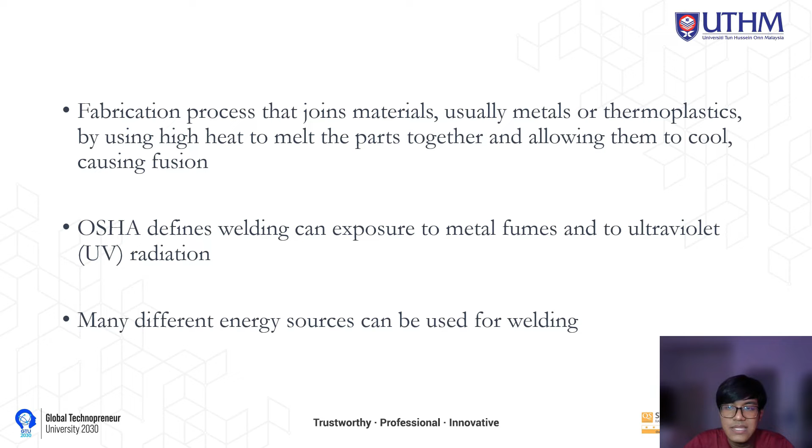Welding work is the fabrication process that joins materials, usually metal or thermoplastic, using high heat to melt the parts together and allowing them to cool, causing fusion. Welding can also expose workers to metal fume and ultraviolet radiation (UV). Safety hazards from this operation include burns, eye damage, electric shock, and crushed toes and fingers. Many different energy sources can be used for welding, including gas flame, chemical, electric arc, electrical, laser, electron beam, friction, and ultrasound. Welding can take place in a variety of settings, including open air, underwater, and even space.

Assalamualaikum warahmatullahi wabarakatuh, my name is Muhammad Haris. So, next is the planning for hazard identification, risk assessment, and risk control.

HIRARC is the strategy for identifying variables that may affect workers and others, such as weighing risk of harm, planning, implementation, and monitoring of measures to control risk at all times. So when a hazard appears to constitute serious concern, HIRARC action must be planned and carried out.

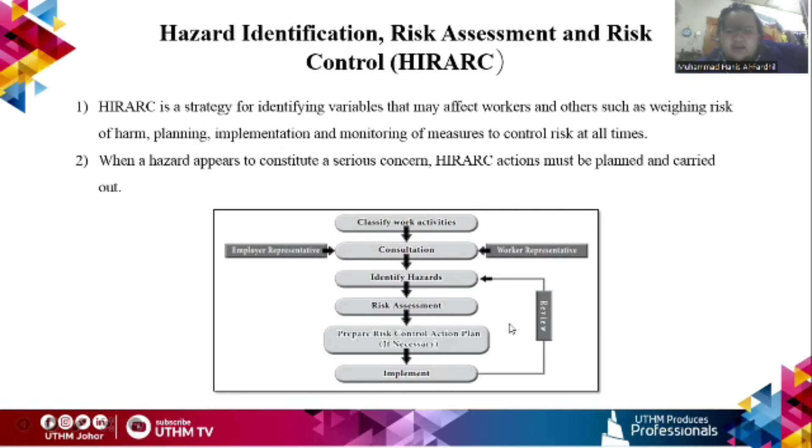This is the table of HIRARC from DOSH. It goes with classify work activities, consultation, which must have employer representative and worker representative, and then identification of hazard, risk assessment, prepare risk control action plan, and implement.

And then if review is needed, it will be done to identify other hazards. Next, we have hazard identification for welding work in construction. Hazard identification was used to determine actions that put employees' health and safety at risk. Health hazard, safety hazard, and environmental hazard are three sorts of dangers.

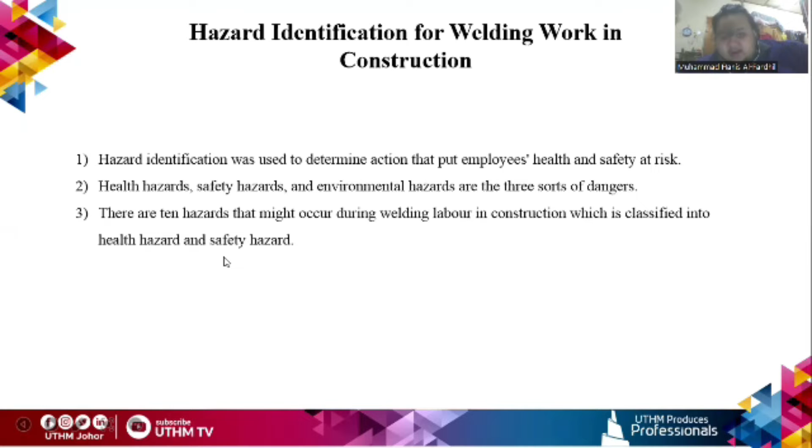In welding work in construction, we have health hazard and safety hazard. There are 10 hazards that might occur during welding work in construction, classified into health hazard and safety hazard. We have the example of health hazard. There are three health hazards that can be identified in welding work. Number one is exposure to fume and gas, which can cause serious issues such as respiratory infection, cancer, and speech and mobility impairment.

Next, we have noise, which can be extremely harmful to the ears, resulting in hearing loss. Noise-induced hearing loss can be caused by repeated or immediate exposure to loud noise. Lastly, we have exposure to UV and IR radiation.

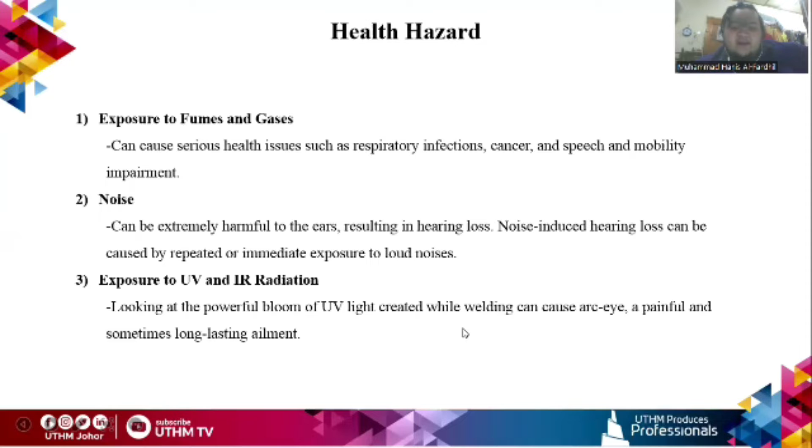Looking at the powerful bloom of UV light and light created while welding can cause arc eye, a painful and sometimes long-lasting ailment. Next, we have the safety hazard. The main hazard from safety hazard is physical. Physical dangers such as burns, eye injury, wounds, and crushed toes and fingers are always present in construction work.

Next, we have electric shock. Rapid electrical discharge in the human body can result in significant harm or even death. Then we have fire and explosion. The most common cause of fire is flammable objects near the working area in construction.

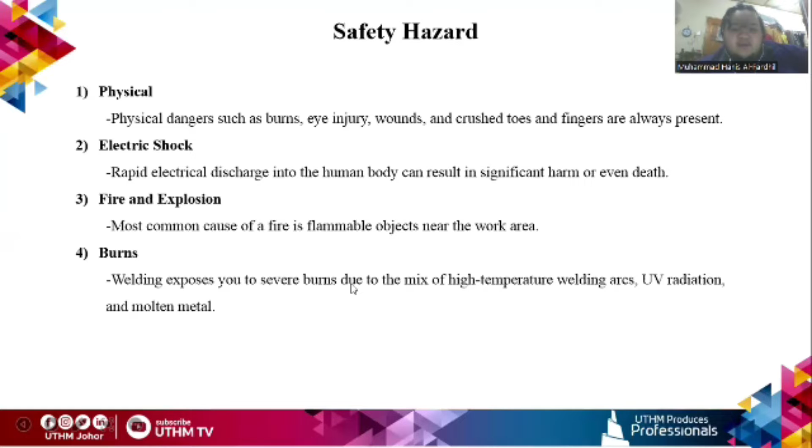Then we have burns. Welding process or work can expose people to severe burns due to a mix of high temperature welding arc, UV radiation, and molten metal. Continuing with the safety hazard, we have confined space.

Welding in tight places can result in lack of oxygen, fires, and inhalation of poisonous gases, such as argon and gasoline. Next, we have vibration.

Working with welding can also be linked to manual labor that utilizes vibrating power equipment. This vibrating power equipment can result in a variety of symptoms, such as hand arm vibration syndrome.

And lastly, we have trips or falls. Trips or falls can also happen in welding work. It is usually caused by hoses or other equipment lying on the ground as a consequence of ignorance or reluctance.

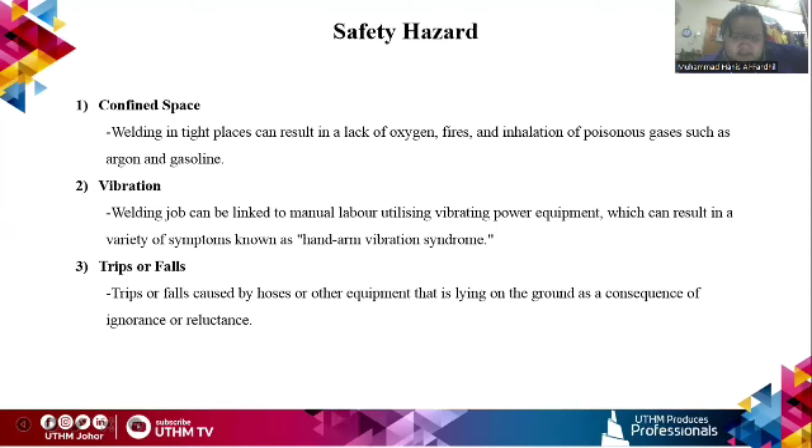Next, we have risk assessment. In risk analysis, a qualitative technique was used to convey the result, which is an analysis that employs likelihoods and severity. The risk analysis result will be presented in a risk matrix.

The risk may be evaluated by multiplying the likelihood and severity. This is the table of likelihood with the rating from highest to lowest, and it will be multiplied with the severity table, also from highest severity to lowest severity.

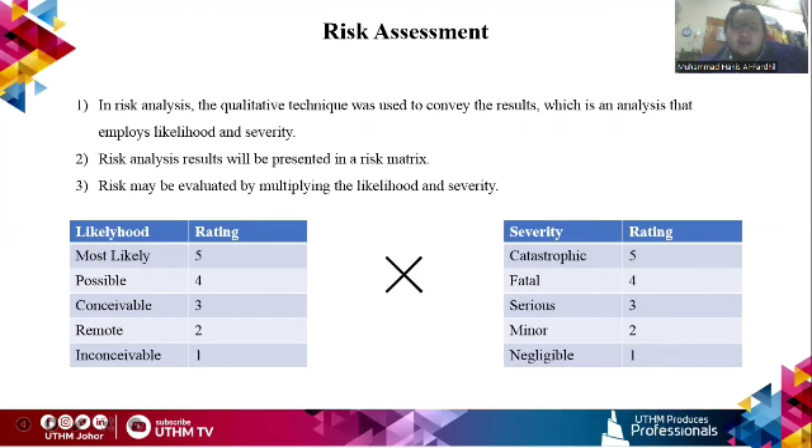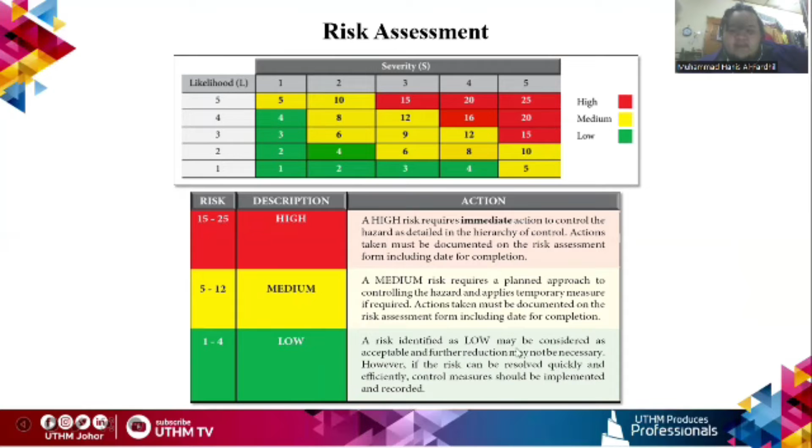And lastly, we have risk control. Eradication or deactivation of danger to ensure the safety of all personnel entering the construction area or working with equipment is known as risk control.

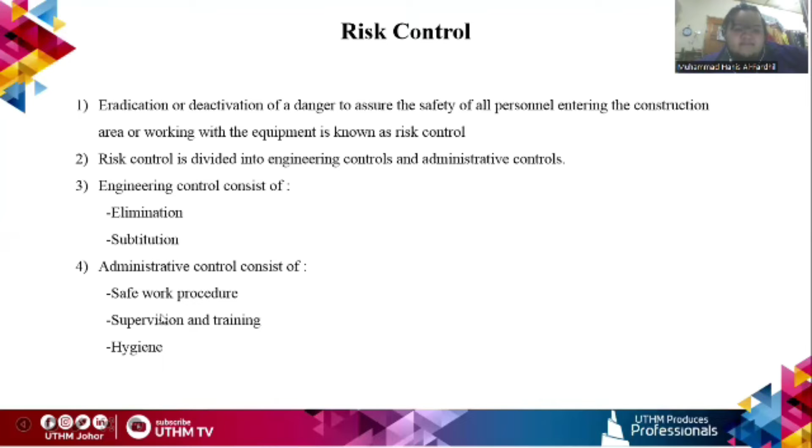Risk control is divided into engineering control and administrative control. Engineering control consists of elimination and substitution, while administrative control consists of safe work procedure, supervision and training, and control hygiene.

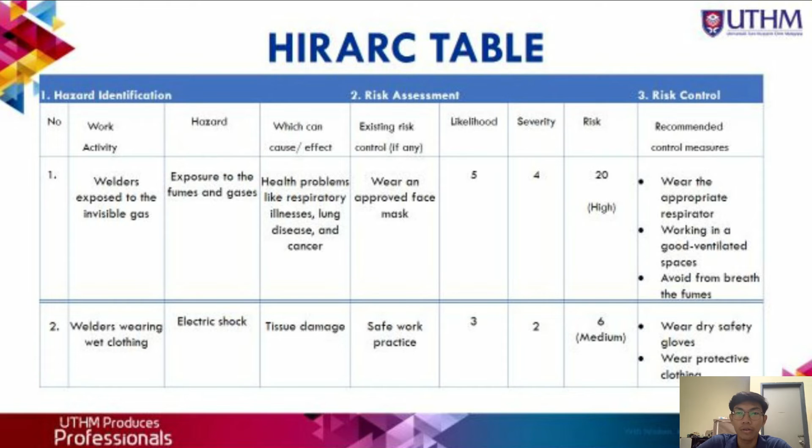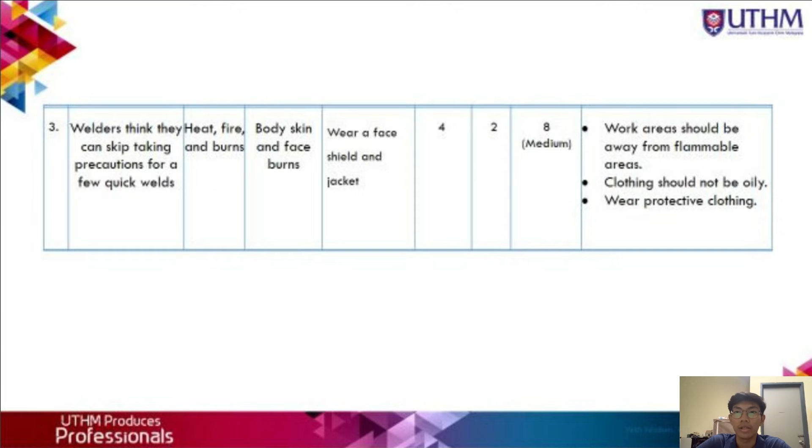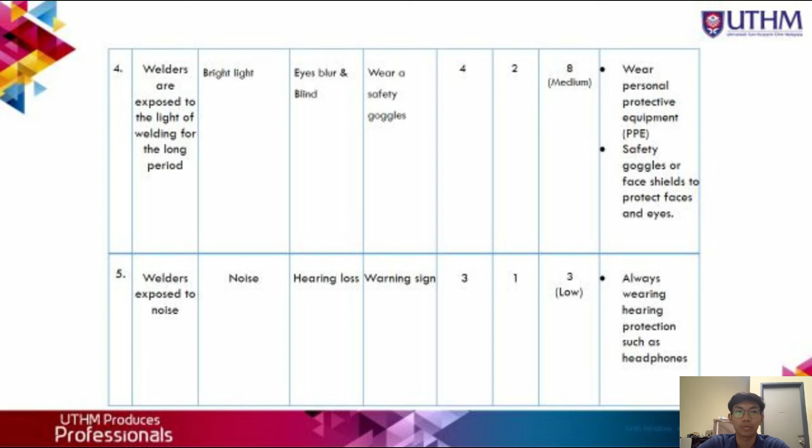Today I would like to present about the impact of the most critical safety and health risks. First, I will explain the most critical safety hazard.

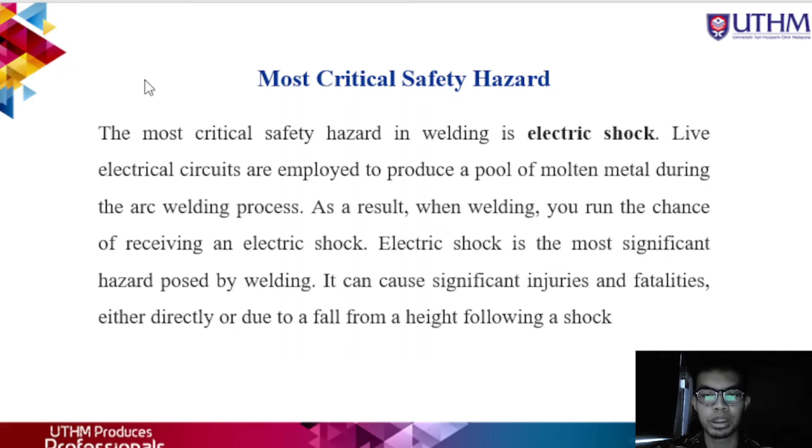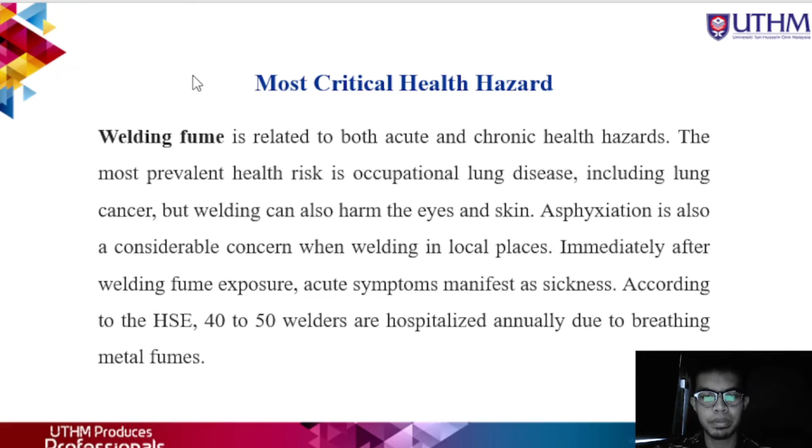Next is the most critical health hazard. What we found is that welding fume is the most critical health hazard. Welding fume is related to both acute and chronic health hazards. The most prevalent health risk is occupational lung disease, including lung cancer, but welding can also harm the eyes and skin. Asphyxiation is also a considerable concern when welding in enclosed places. Immediately after welding fume exposure, acute symptoms manifest as sickness. According to the HSE, 40 to 50 welders are hospitalized annually due to breathing in metal fumes.

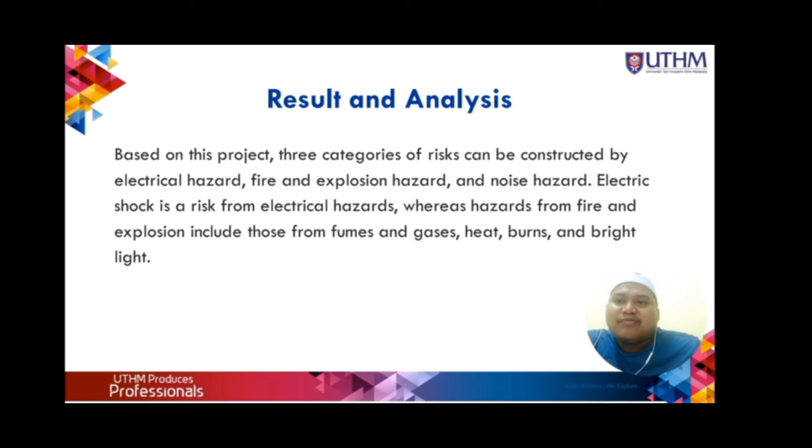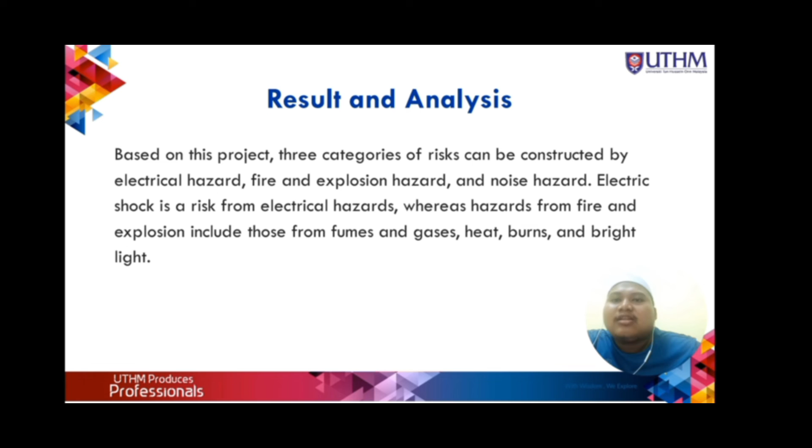Based on this project, 3 categories of risk can be constructed: electrical hazard, fire and explosion hazard, and noise hazard. Electric shock is a risk from electrical hazard, whereas hazards from fire and explosion come from fumes, gas, heat, burns, and bright light. Number one is electrical hazard.

Existing risks: number one is overdue cables and faulty electrical installation connections, using subpar hand instruments like an angle grinder or welding torch. The control measures: number one, all wires and cables used for welding are currently fitted with electrical trunking above the user's head. Number two, the installation of the generator set needs to be approved by a qualified chargeman.

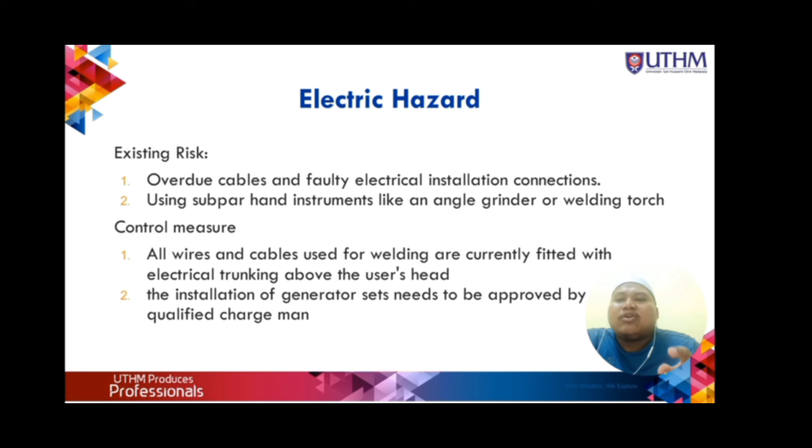Next is fire and explosion. Existing risks: number one, highly flammable gas like propane and oxyacetylene gas are used. Number two, welding generates heat and spark. Control measures for this hazard: number one, all propane and oxyacetylene cylinders have a non-return valve or flashback arrestors. Number two, oxygen and acetylene gas cylinders need to be stored separately and kept away from heat sources.

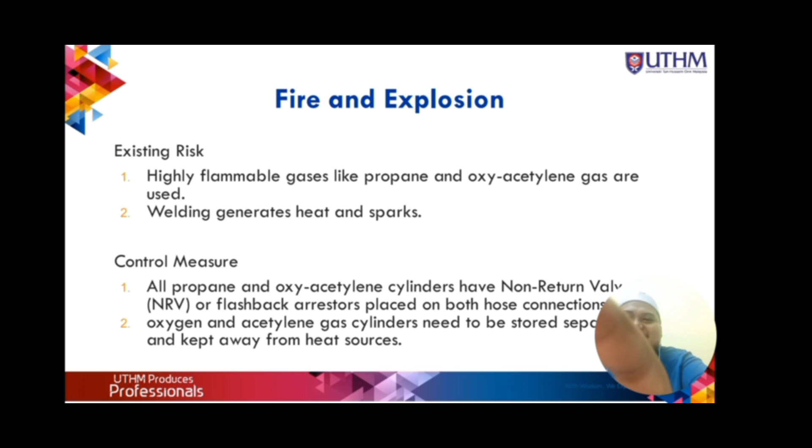Lastly is noise hazard. Existing risks lead to psychological stress and decreased productivity, in addition to hearing loss. The quality of daily communication can also be impacted by hearing loss. The control measures for this hazard: number one, installing a portable sound dampener may be an option for this facing machine. Number two, provide personal protection equipment (PPE) such as earplugs and so on to all workers.

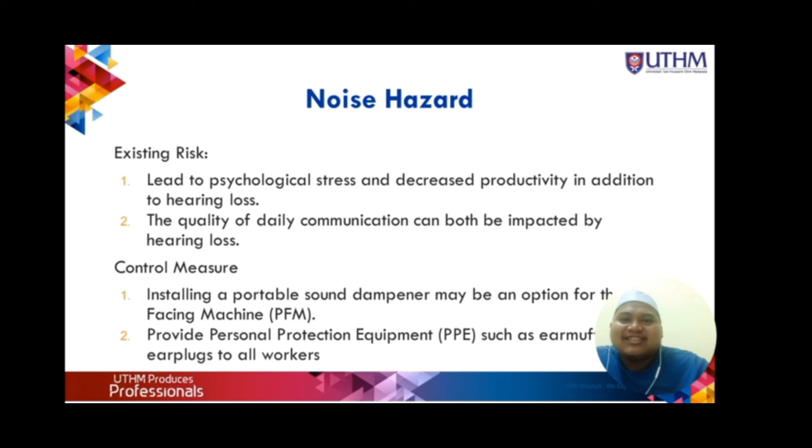Thank you. So I will present about the conclusion.

As a result, welding activity should be done with caution whenever possible, and avoided if at all possible. However, some incidents are unavoidable and can be extremely dangerous to the workers concerned. When it comes to protecting entrants from immediate danger, adequate detection of the hazardous atmosphere when welding is critical. And as gas detection technology develops, we may be able to protect employees from greater long-term damage from toxins like dangerous smoke. This has proven to be beneficial in decreasing welding-related incidents.

In welding, the entry permit system is a sort of administrative control. Moreover, welding frequently requires the use of PPE equipment. Before beginning work, the most important and first thing an employer must do is brief staff about health and safety dangers. On the other hand, wearing personal protective equipment (PPE) might result in greater heat and decreased movement. This should be studied thoroughly.

Always utilize PPE as part of a PPE programme, and examine all the protection risks and hazards prior to usage. That's all from our group.